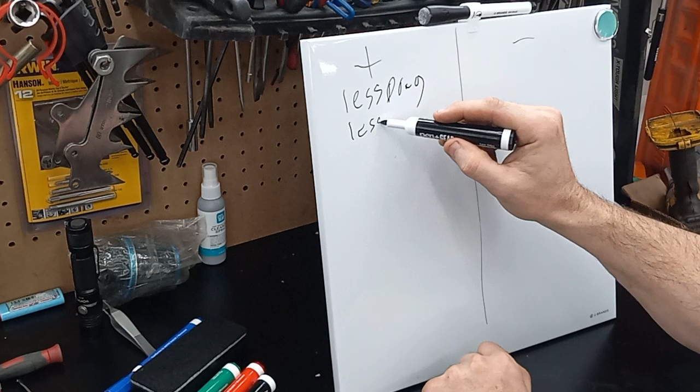Less drag - and you guys are going to see some really bad writing here. You got less drag on the ring, you got less heat. So there's two benefits. What's another benefit?

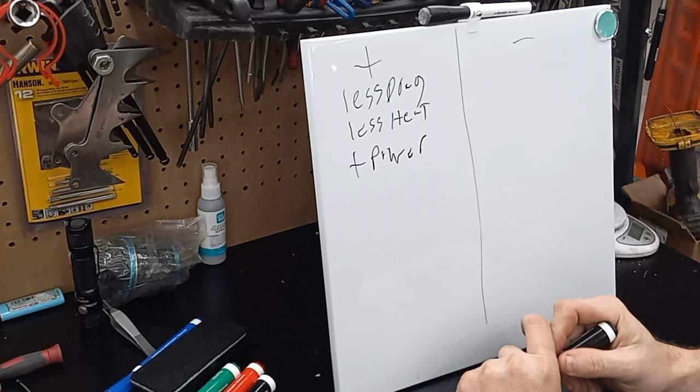Sometimes you can make more power. So by doing a low tension ring, you can get three benefits right there. There's probably more too.

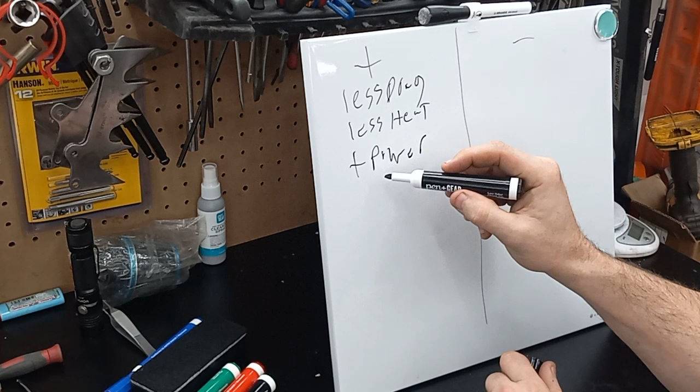Running one ring, you'll get more oil on it. And we'll talk about that in a minute.

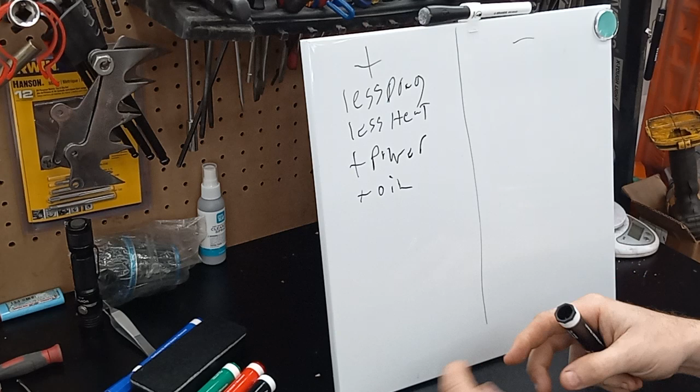Now let's talk about the minuses of doing this. Well, you have less tension. Less tension means that the edge of this ring on your cylinder wall, where that ring is, there's less tension here and here. If there's less tension, pressure can push past it, and then you can get blow-by.

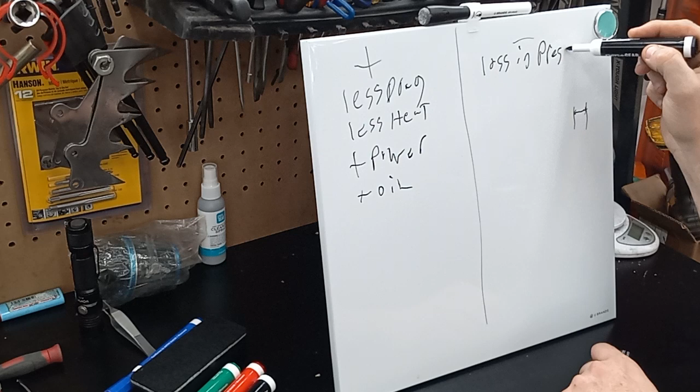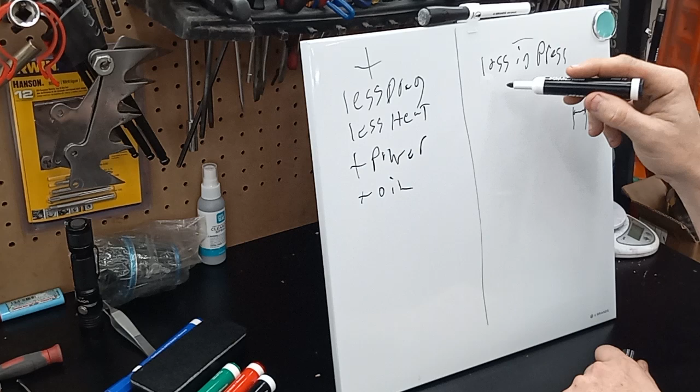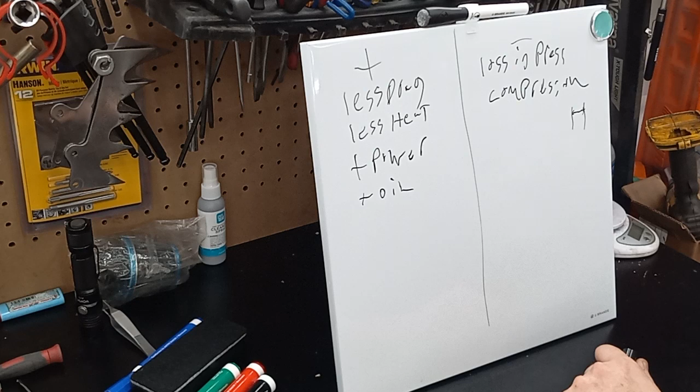So, loss in cylinder pressure. So you can lose pressure. You can lose - that would typically lose a little bit of compression. So, man, I'm horrible at this, guys. So there's two losses right there.

I mean, it's minuscule by now, but what else is going to happen? You're going to get ring flutter.

You're going to get ring flutter. So for every positive thing, there's also a negative thing. And how can we fix some of this? Well, an old timer showed me probably 25 years ago, back when I was building big engines, and we called it porting the piston.

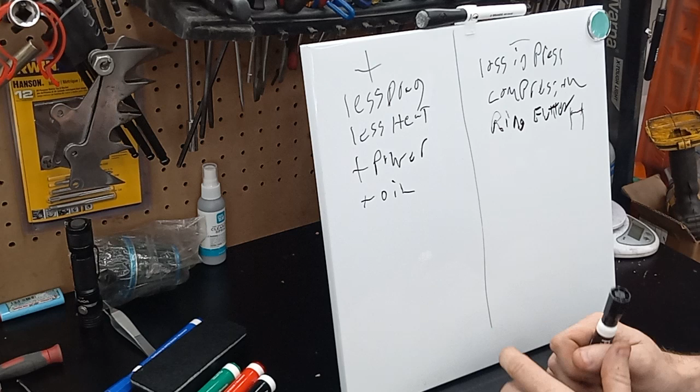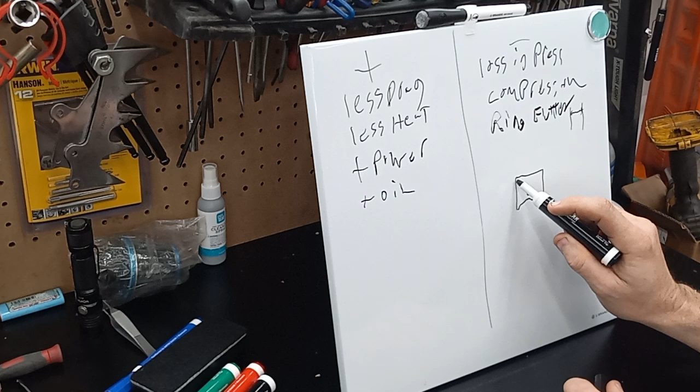Porting the piston. And what porting the piston does, let's say here's your piston. Now this is kind of cool, I can just do this. There we go, there's the wrist pin. There, that looks more like a piston. And then you got your ring land.

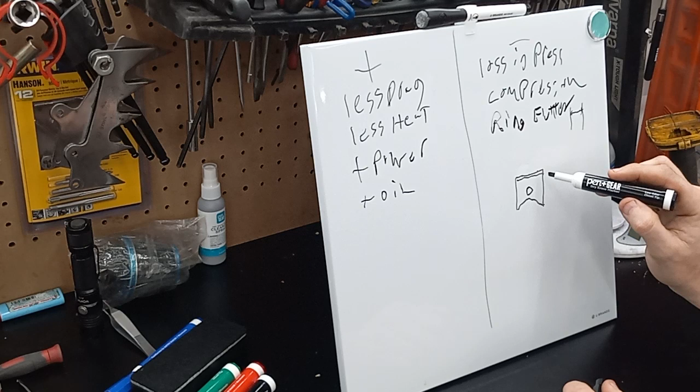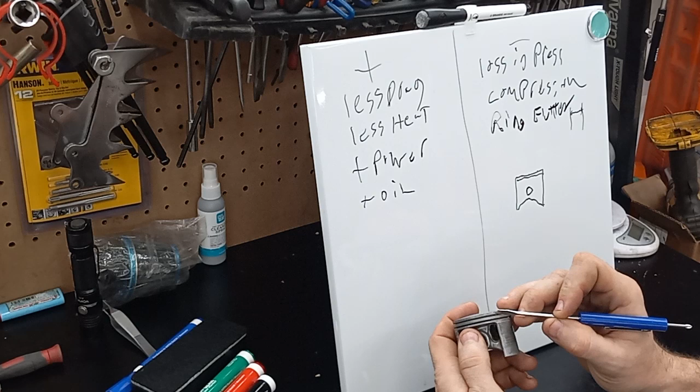Porting the piston would be where you come in here, and on a big engine we would put between 8 to 12 little half moons on the top of the ring land in strategic spots across the piston. That would be, let me grab this piston here, right in here. Kind of like how your pin stopper is, we'd do something like that, but in strategic spots across the piston, and it would only be on the top.

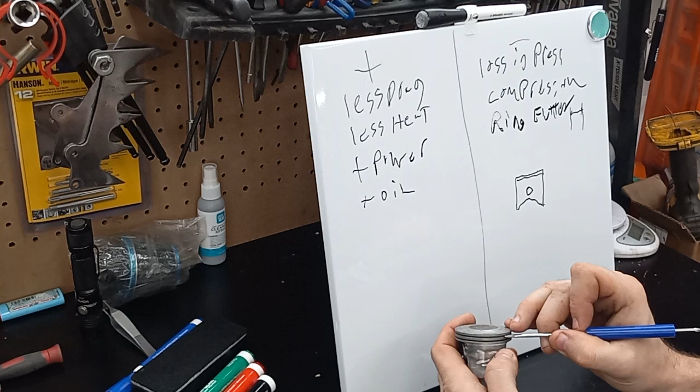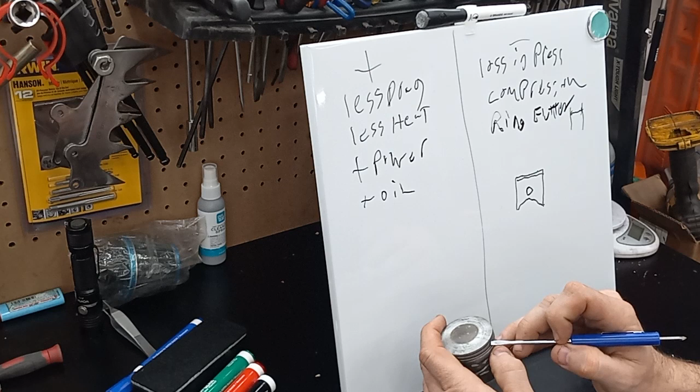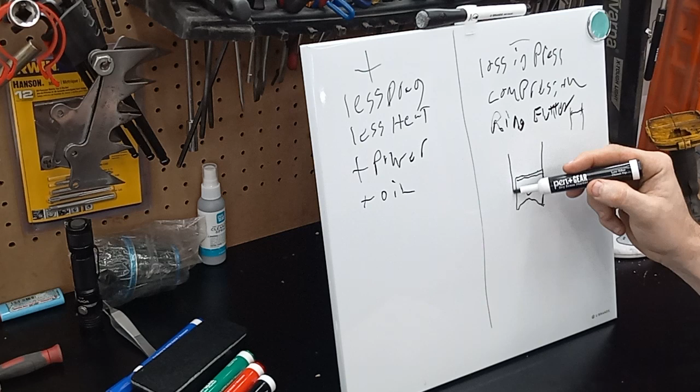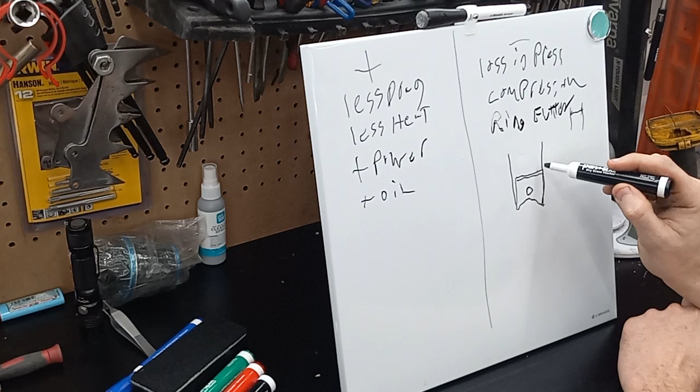And we would do that by using a little drill. You do not drill through your piston, because that would be bad. And you do not kiss the bottom of your ring land. And what this does is, here's your cylinder wall - real bad example of it - but when this is under high pressure, gas porting that piston allows that high pressure gas to go through the grooves you put on the top lands of the piston, and it allows that high pressure to actually come in and get behind the ring and push the ring harder into the cylinder walls for a better seal.

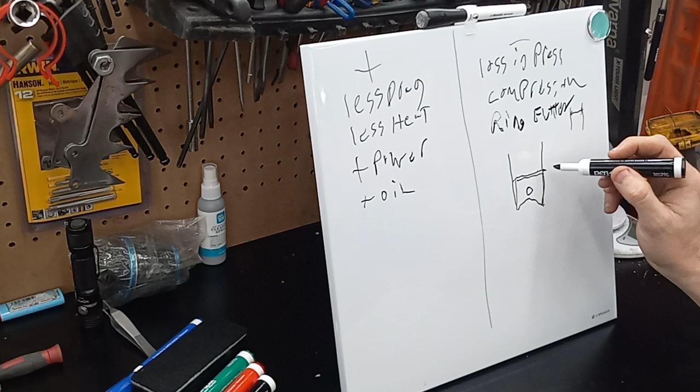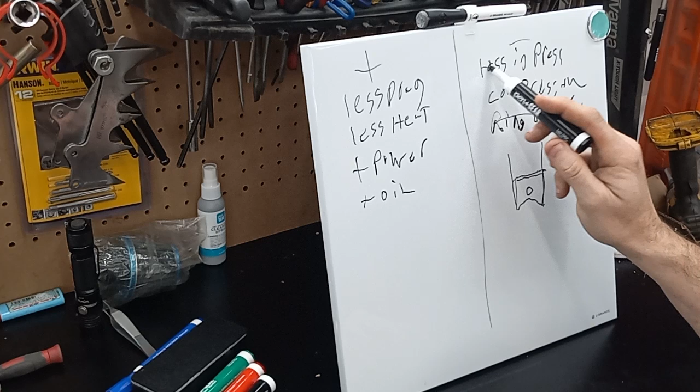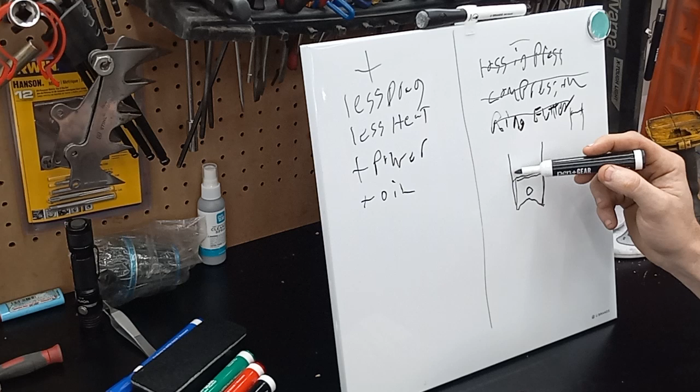And we would do this on drag engines. Gas porting that piston would fix the ring flutter, it would fix the loss in pressure, and it fixes the loss in compression. Now what's the downside of doing that? You add more stress to the edge of the ring and the cylinder wall because it's putting tremendously more pressure only upon compressing it and the igniting of the gas pressures pushing down. After the exhaust opens, the pressure is relieved, and then this ring goes back to low drag.

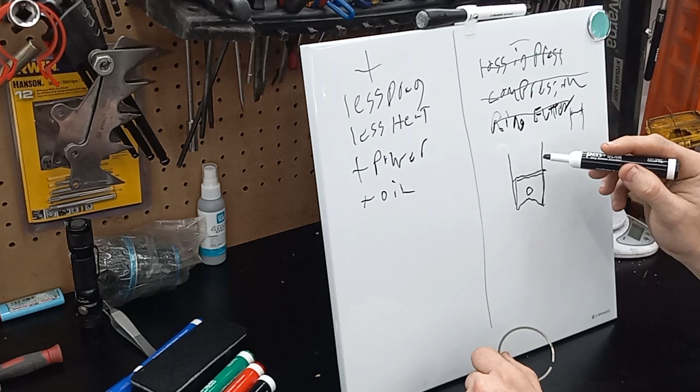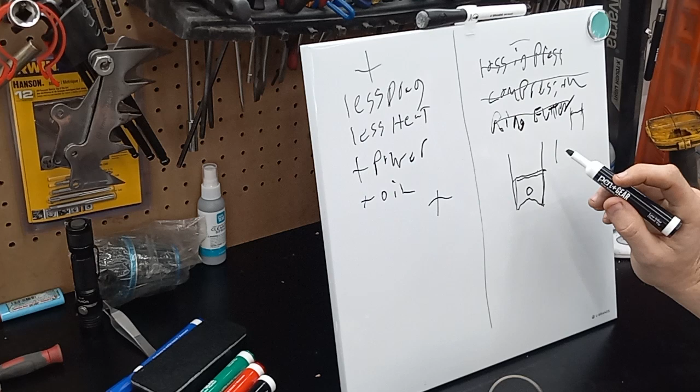So you know, people always wonder why high horsepower drag motors and stuff get rebuilt all the time. Well, this is one of the things. It does create excess cylinder and ring wear, but it also is a big bump in performance by gas porting your piston. It almost cuts ring flutter to nothing, and when your ring's fluttering, that's where the ring's shuddering on the cylinder wall, and it's losing its ability to seal against the cylinder wall. So if you thin your ring, do a low tension one, and gas port that piston, it solves all these problems, but you do add wear.

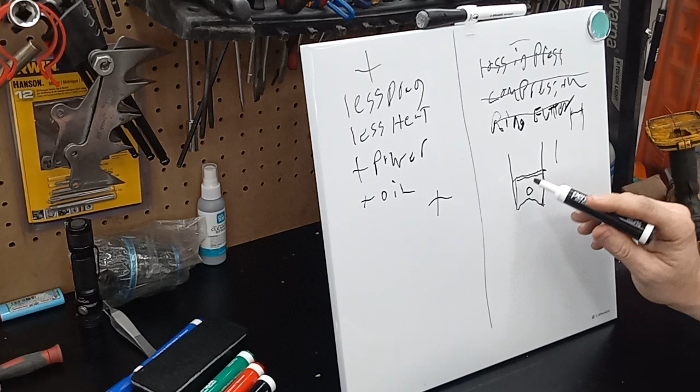So take that to how you guys will. But there's three ways, I guess, that I see Total Seal offers gas slotted rings right from Total Seal now. They took what racers were doing, realized it works, and now they're offering it in rings. And I believe you can get pre-gas ported pistons for big engines as well. I've not seen any that I'm aware of for chainsaws, but what works on a big engine piston will most definitely work on a small engine piston.

I took a broken ring right here and put a little groove in it to kind of emulate what Total Seal's doing. They just have a little slot so the gas can come in there and get behind it. I wouldn't recommend doing that if you thin a ring. Another thing that you're doing when you thin a ring is you're compromising the ring. It's going to be more susceptible to breakage, which breaking rings does happen in high performance engines. It can happen.

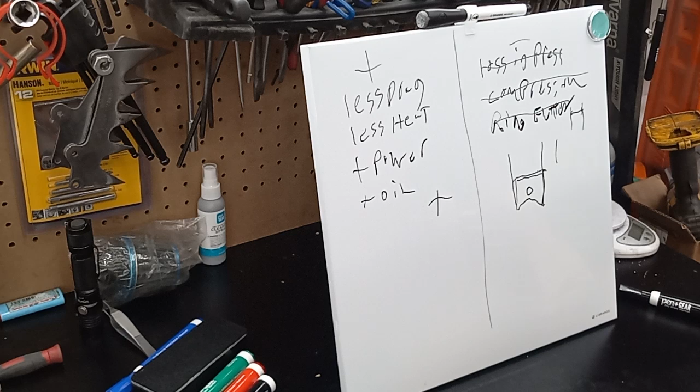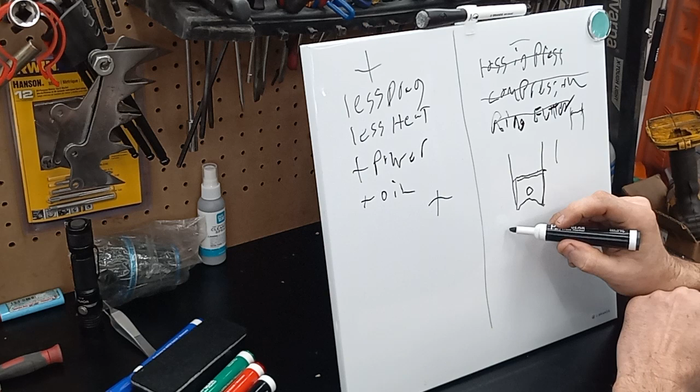I'm very, very sorry that I'm doing a horrible job explaining this. This is my first crack at it. I was trying to think how I wanted to explain that to you. But if you're going to thin your ring, you might as well gas port your piston, which I don't know if I got. Where's my Sharpie? Which gas porting the piston - I don't want to use the Sharpie on the board, but let's see if I can do a bigger piston, see if I can make this easier for you guys.

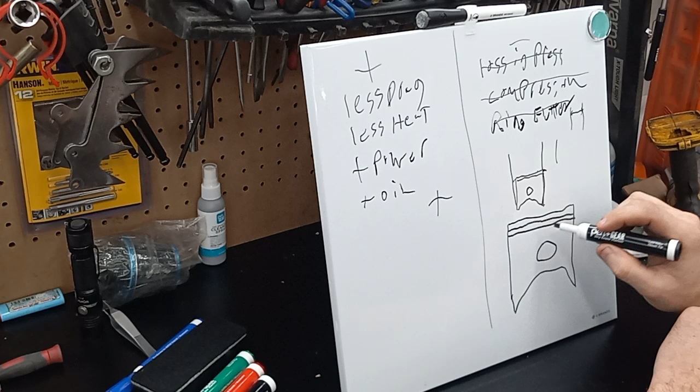Can't draw a straight line to save my life. But let's say that's the ring gland right there. You would strategically place your little half moons, probably on a small, say like 50 millimeter, you'd probably not need more than 6. You know, on a 4-inch piston we were doing between 8 and 12.

I would think 6 would probably be sufficient for a 50 millimeter. But you would strategically place your gas port on the top of the gland like that, and that allows the high pressure charge to go in behind the ring and push it out.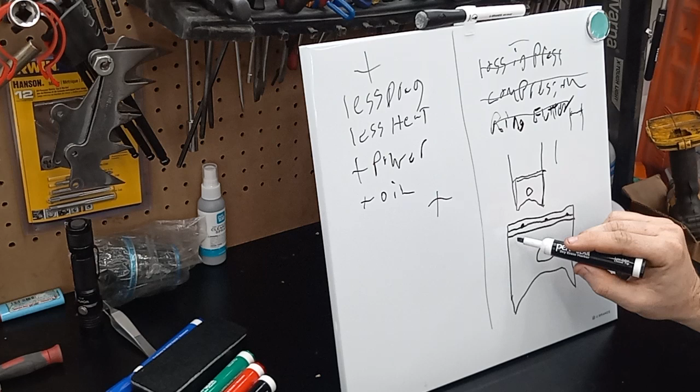You don't want to drill through the piston, and you don't want to drill or mangle any part of this lower part of the piston gland, because if you damage any part in here, that high pressure gas is just going to go right around the ring, bypass the bottom of it, and into your crankcase, and that would not be good. So, but that's a trick.

He's long gone now. He was a hell of an engine builder that I learned quite a bit off from. That's something that I really enjoyed doing, was hanging out with the old timers, and I learned a lot from them when I was in my youth building engines.

They called it gas porting, and there's different ways of doing it too. You can also come through the top of your piston and put little holes if you wanted to, but you're going to want to not touch that bottom ring gland at all. I do not recommend that method. I like coming in and just putting a little half moon, divided up between 6 and 8.

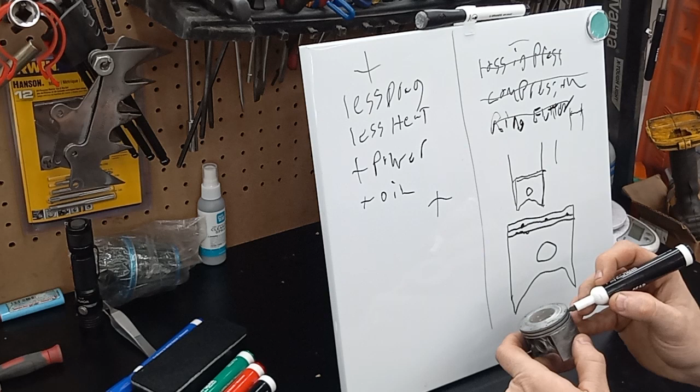6 would be the bare minimum, I would think. It doesn't have to be crucial, but all you're doing is basically mimicking that half moon, kind of like the pin does, and it's just allowing a little gap for the high pressure from the cylinder pressure to come in. It pushes the ring out against the cylinder wall, and it seals it up, and you will get more power.

And I said I'd talk about getting more oil with one ring versus two. When this ring, especially if you got these ports in there, when this ring's coming up the cylinder wall, there's leftover fuel and oil residue on the cylinder wall. That ring's scraping against it. It builds up as it's coming up, and as it's coming down, that ring is scraping it, which is lubricating and cooling that ring.

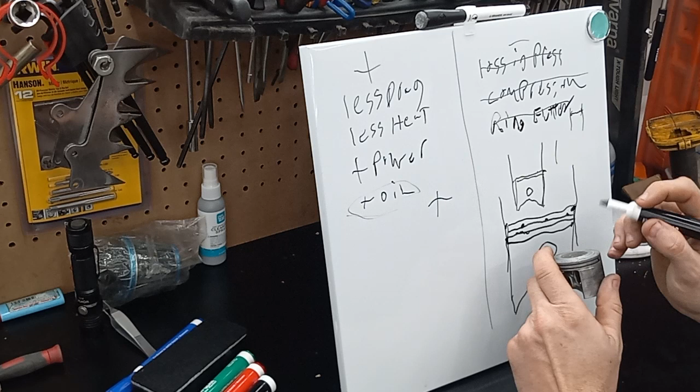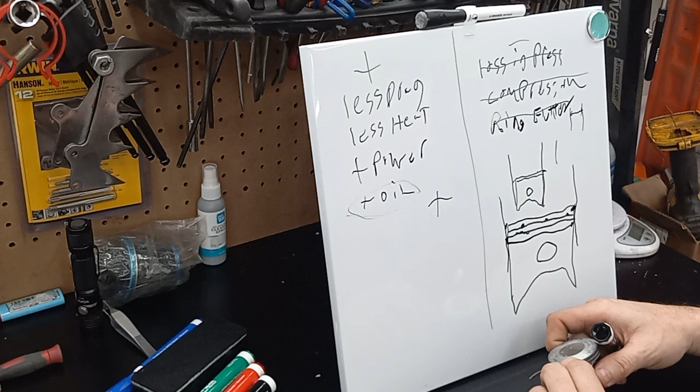If you got two rings there, like this, the bottom gland and the top of this one tend to get more wear because they don't get as much oil in between them. This part of the ring gland seems to oil good, and so does the top part, but the middle part, top and bottom, gets less oil. It does get a little bit more heat, but from that ring going up and down with less oil, that's where a lot of your slop in your ring glands comes from.

You guys could probably take a junk ring like this and put a half notch in it for a guide, and you could probably snap it right into a piston if you were worried about hurting the bottom, and use it as a guide, then use your Dremel and go in there and put your little half moon marks in.

But I'm sure there's got to be info out there on gas porting pistons. It's been done for years and years and years, and it works so well that, I mean, Total Seal's a pretty reputable company, and you can get Total Seal piston rings that are gas ported right from the get-go.

I would be scared on a chainsaw. These rings are quite a bit smaller, and if you were to notch it six notches all the way around, I have a sneaky suspicion you would probably really break that ring. But I just did that little mark to show you guys. I think I'm going to call this part of the vid before it gets too long.

Like I said, Harvey made a great video showing, he had something similar to this, but I think it was the drums that fit over the things, where he was going in and holding the ring and grinding it like this, which that method absolutely works too. I've done it. I prefer putting a ring, just got to be careful when you do it.

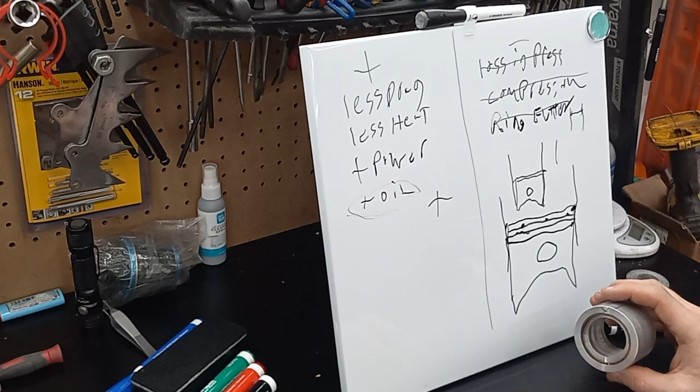I like putting the ring in a fixture something like this, and then just bringing it up to where it's flush like that, and then you can even use one of these. I like using the stones, and then while it's turning on the lathe, I'll just grind or sand it out that way. Either method works, but keep in mind when you're modifying rings, you are compromising them.

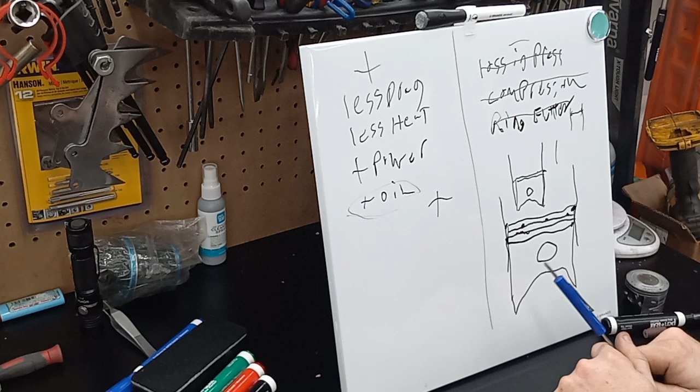I'm sure there's a few things in here that I'm forgetting about, but everything that you do, there's always a cause and effect on everything. By gas porting your piston, the only downside with that is extra cylinder wear. But if it's a cookie cutting saw that you're goofing off with, it don't matter.

I just thought I'd share some of this knowledge on pistons that was passed down to me on big engines. I've got several small block Chevys out there running pistons that I drilled little half moon shapes in on the top gland all the way around that piston, and they made really good power.